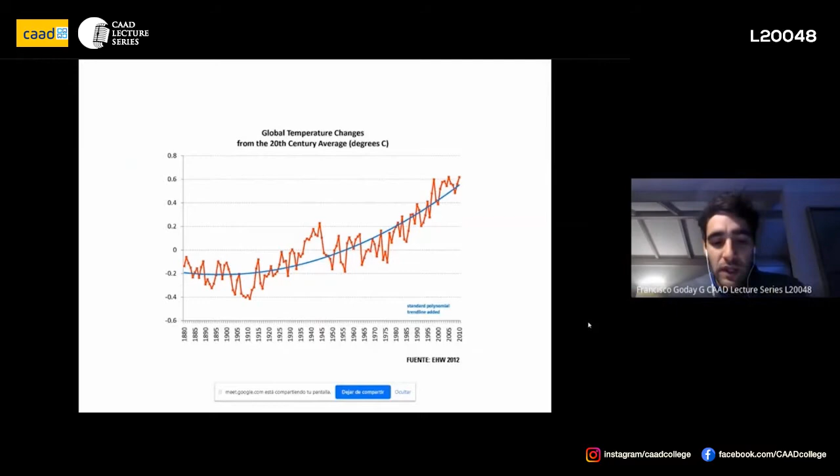For example, during 2016, the global tree cover loss was 21% higher than in the last 20 years. In 2017, here in Chile, we lost more than 450,000 hectares of forest. This was more than in the last 10 years.

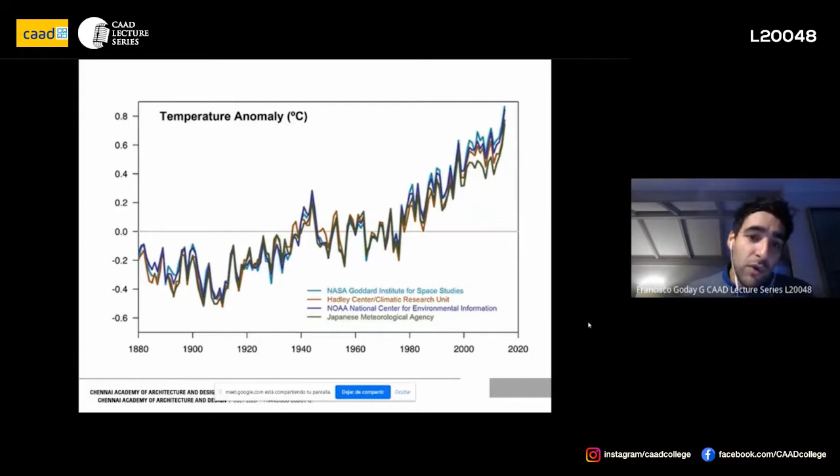For those of you not familiar with this subject, the greenhouse effect is a process that occurs when gases in the Earth's atmosphere get trapped and trap the heat produced by the sun that hits the Earth. This actually makes the Earth a very comfortable place to live for humans.

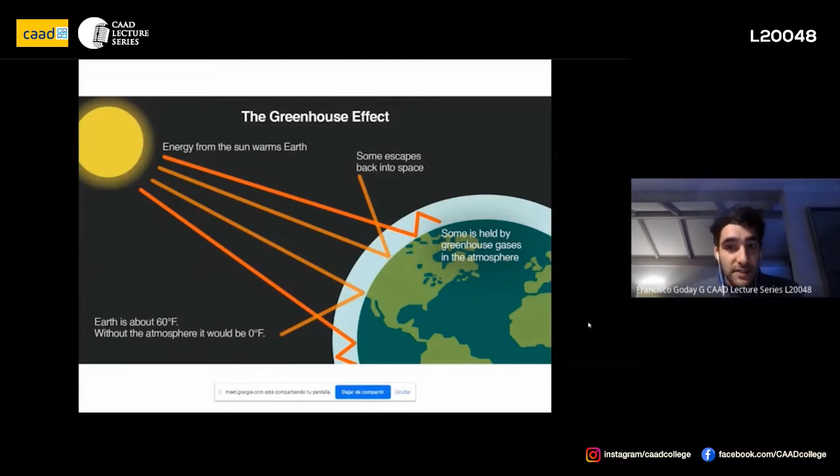But the problem is that these gases that trap the heat have never been so high, especially the CO2, which had never gone beyond 300 parts per million in the history of this planet, and nowadays is reaching almost 400.

This graph is part of the movie An Inconvenient Truth, which I recommend to all of you. It was directed by Al Gore in 2006, who was a former USA presidential candidate, and it explained very well and in detail this process of global warming that we are living and how we should face it.

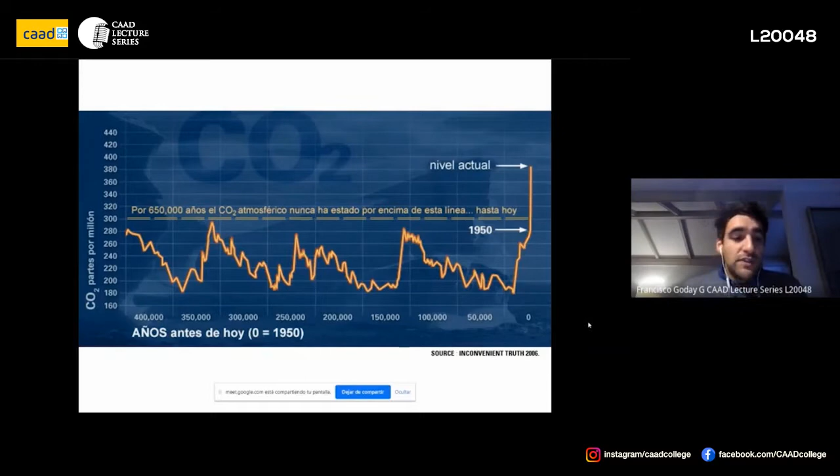So the CO2 comes from most of the activities we do in our daily routines, especially the energy we use every day. Probably all the energy we consume, all the activities we do, that energy comes from oil, coal, and gas. Those are non-renewable energy resources, and they also produce high CO2 emissions.

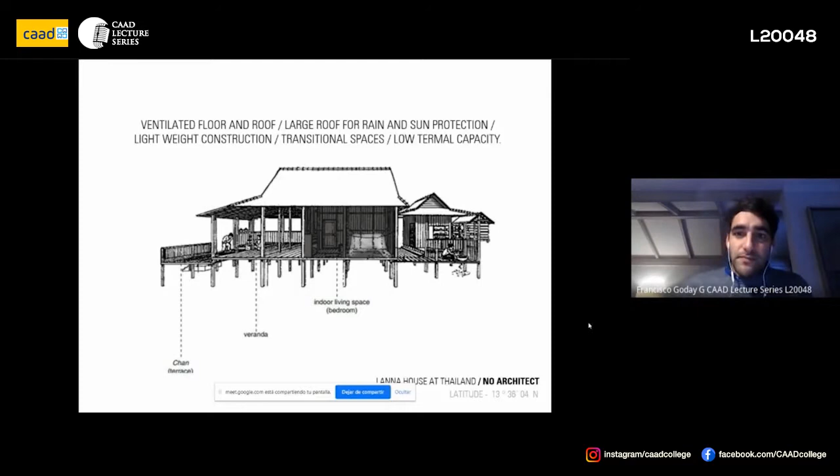Well, we can look at this for a long time, but to make my point, I think this quote from Le Corbusier, 1957, is very interesting: tradition is the unbroken chain of all the innovations, and thus the surest indicator of the projection to the future.

This opens the second part of the lecture, which is my academic approach and my interest in vernacular architecture, the kind of architecture without architects. It is the purest architectural response to the needs of a person or a society. These methods and strategies from these architectural typologies are tested through a process of trial and error, directed by adaptation to climate, availability of materials, function, and the traditions and sociological needs of a given culture.

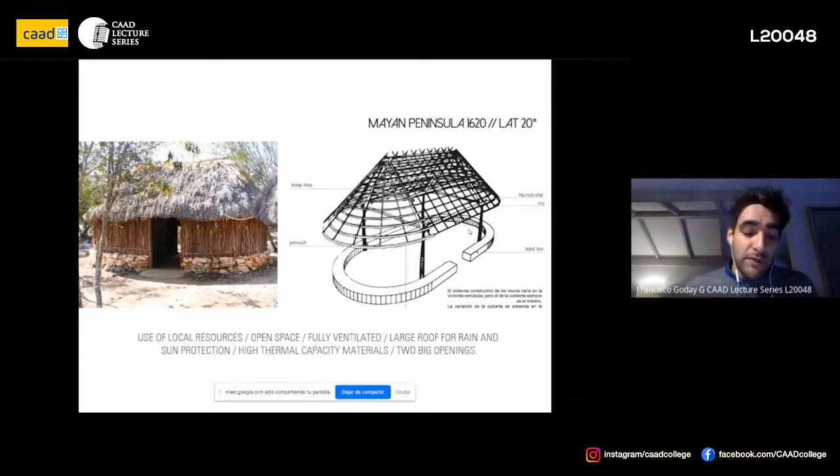Amazing wind catchers in Dubai also work with thermodynamics. The cold wind goes down this chimney, cools even more passing through an underground tunnel, then goes through a water fountain and gets into the habitable spaces of the house, offering much better conditions for the inhabitants. These are all simple strategies using physics, and of course reducing the energy consumption of the building to nearly zero.

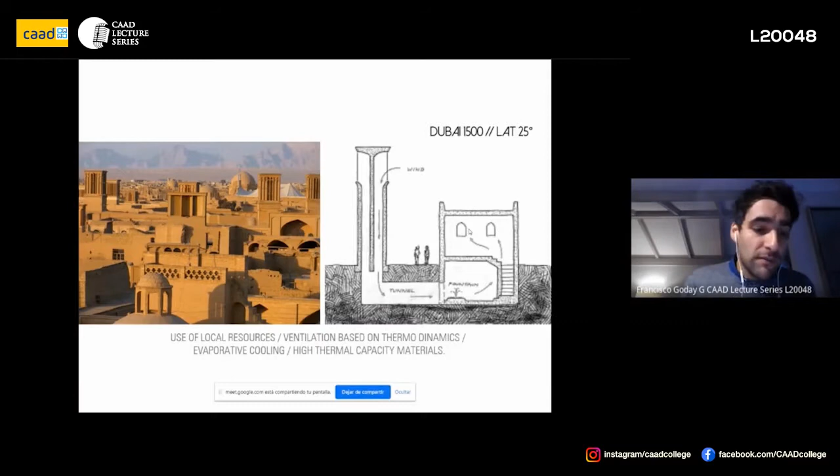To tell you a little bit about my country: in Chile we have more than 22 different climates, ranging from the driest desert in the world to Antarctica at the South Pole. I wanted you to remember that for us, north is the orientation facing the equator, and south is the other side—it's not like in India.

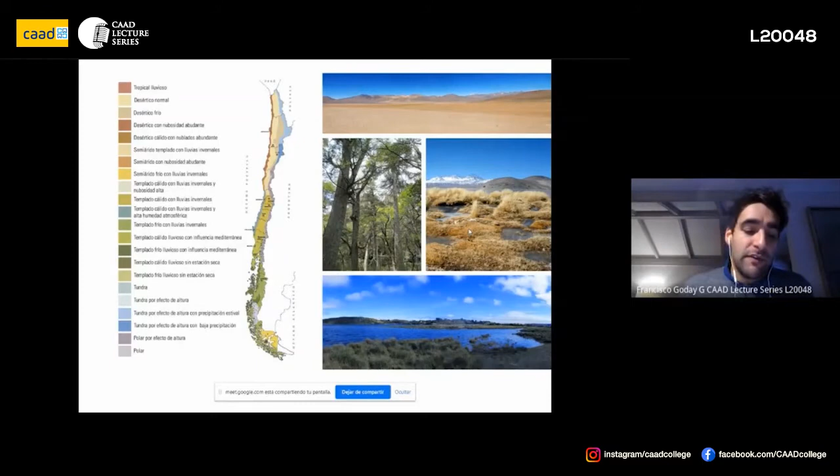The different climates we have in Chile are due to three main factors. The first is the longitude of the country—we go from latitude 18 to latitude 53 in the south, more than 6,000 kilometers of coastline.

The second factor is the Humboldt Oceanic Current, an oceanic current that brings very cold water from the deep sea to the upper part of the sea, drying the atmosphere and producing this dry ambience in the zone of Atacama.

And also the geography of the country—we have the Andes Mountains on one side, and these produce several valleys in the middle, between the Andes Mountains and the coastal mountains.

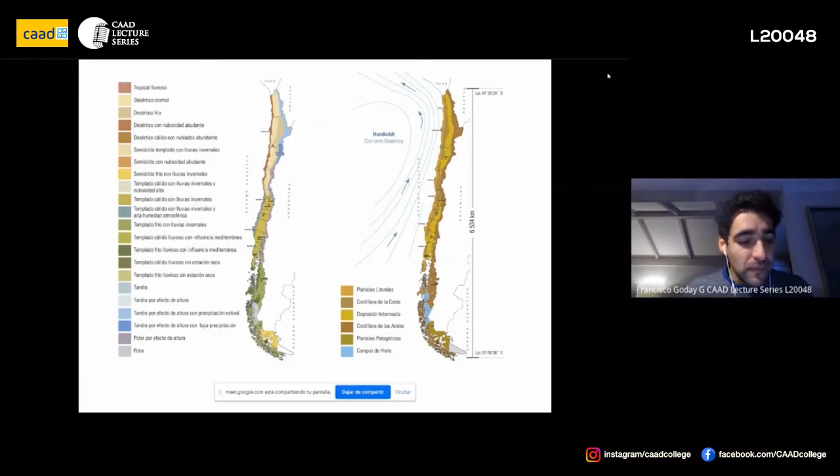We also have different kinds of vernacular typologies, ranging from the extreme north with the house of the Atacameños, in the Central Valley the Chilean traditional house, and the ruca, which is the typology our Aborigines were using before the arrival of the Spaniards. Then in the extreme south we have the palafitos, a house placed between the land and the sea, on stilts over the water.

So I would like to go a little deeper into one of the Chilean traditional houses. All these analyses are part of the investigations we do in my academic courses. The Chilean traditional house is at latitude 33, with a climate that is hot during the summer but very cold during the winter.

This house is an adaptation from the Conquer typology, the Aragonese house that comes from Spain. That house was a three-story building with a small patio in the middle, but probably in Chile, because of the available materials and the earthquakes, it was built as one story, more expanded, and completely looking inwards as a way of protecting the family from Aboriginal attacks.

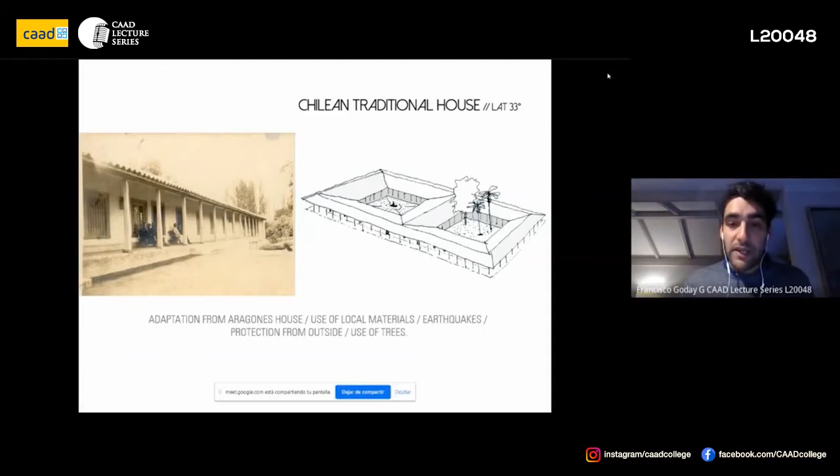It was divided by two courtyards, one social and one private, with corridors and eaves that configure transitional spaces all around the house. These eaves were designed with solar geometry, allowing solar radiation inside the spaces during winter and blocking it during summer.

The material, which is adobe, a mix of straw and mud, offers a high thermal capacity material that traps the heat during the day and releases it during the coldest hours of the night.

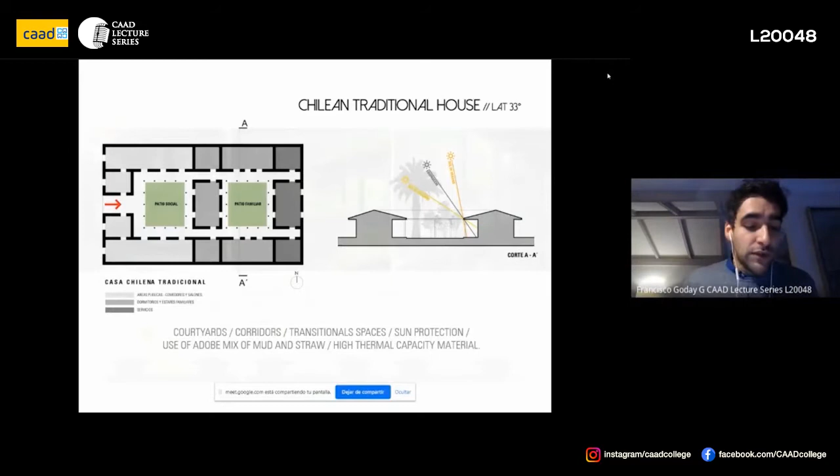These two courtyards were spaces of social delight, but also, if you see the floor of them, they were made of stone. They were also trapping the heat received during the day, and during the night, with cold winds going down the center of the courtyard, as you can see in the schemes at the bottom of the diagram. This heat moves from the center to the interior spaces and corridors of the house.

The trees that you can see in these courtyards were also a decision. The palm tree acts as an umbrella, blocking solar radiation into the courtyard during summer when the sun is very high, but allowing the sun inside the courtyard during winter when the sun is lower in the horizon.

As a conclusion to this part, I would like to read this quotation from Amos Rapoport, from his book called House Form of 1969, which I think resumes what vernacular architecture is, and the importance of taking these strategies into consideration and applying them in our designs. These builders and artisans have learned to solve their problems collaborating with nature, considering that each failure would mean having to face the forces of nature in first person, which is not the case of an architect designing for someone else. His buildings have long been adapted and designed as natural refuges to protect and safeguard life, no matter what that means.

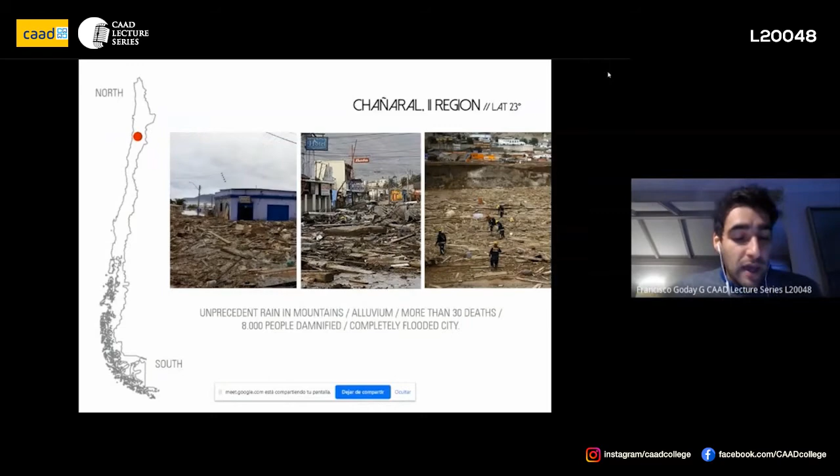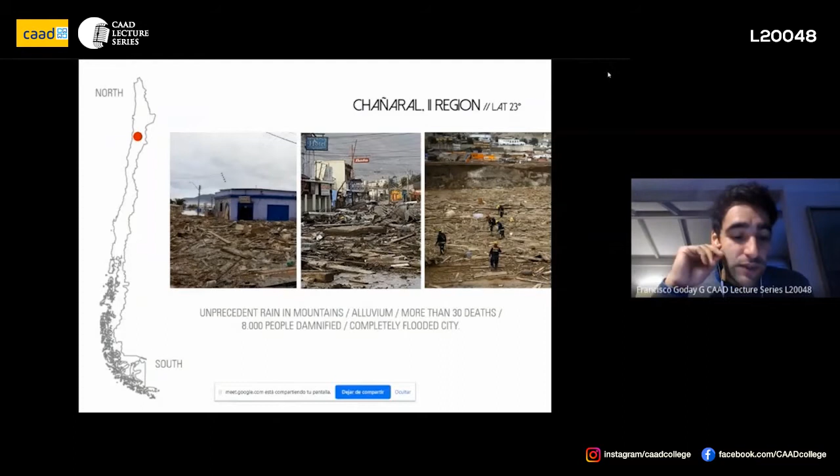During March of 2015, they had unprecedented rains during the summer that produced a huge alluvium inside the city, with more than 30 dead people and 8,000 people damnified, everything completely flooded.

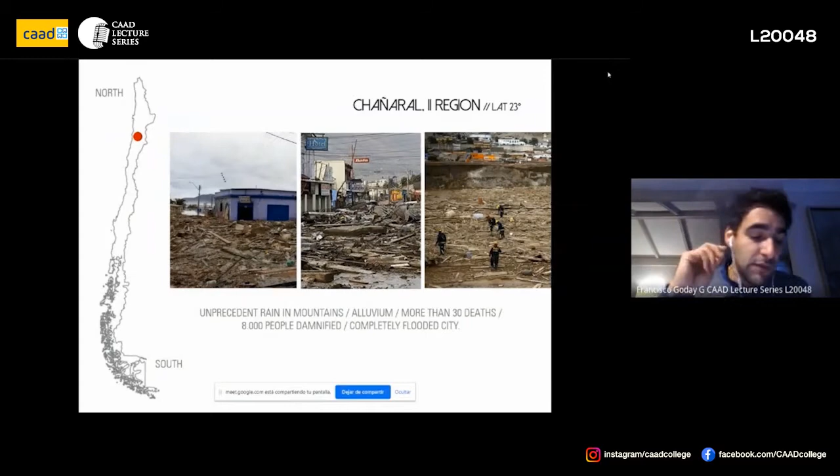So we were invited to this huge challenge. We had 120 days as part of an interdisciplinary team of professionals to build a master plan for the city, and also organize and rank the investments of the city for the next 10 years.

We built this structure based on analysis, diagnosis, and proposal, specifically on four main subjects that were fundamental for us: protect the city from its geographical risks, and the urban growth and regulations of the city—how the city was growing and how it was moving.

Also the mobility, to understand how people were going from one side to another, and of course the public spaces and green areas, to understand if people were using the city or not.

Our main objective was to create the first city in Chile that organizes according to climate, geographical risks, and sustainable mobility in public spaces, with public spaces centered on people.

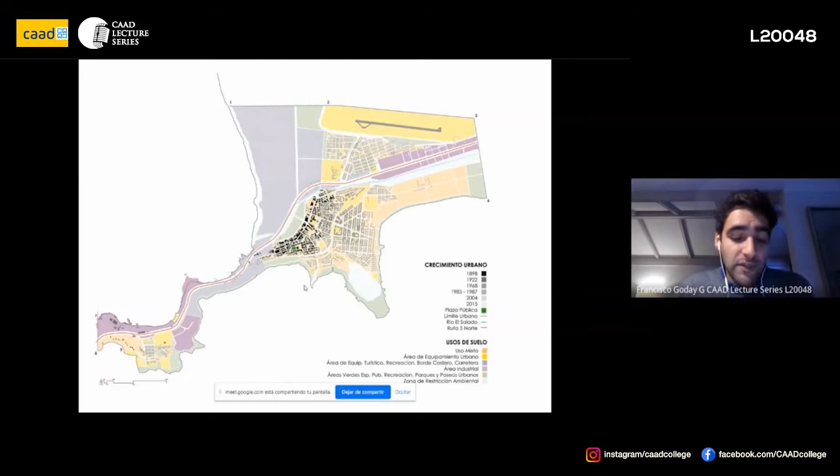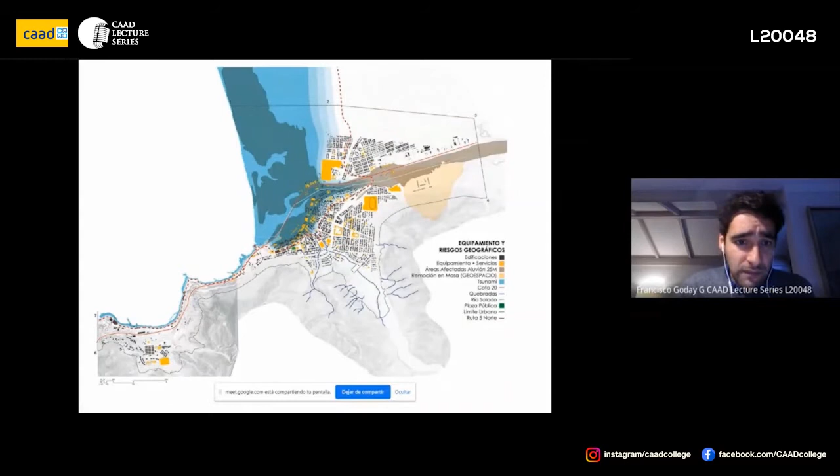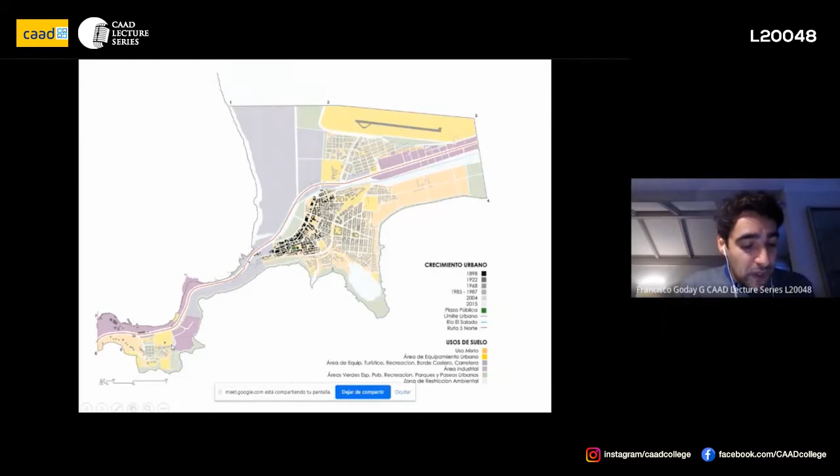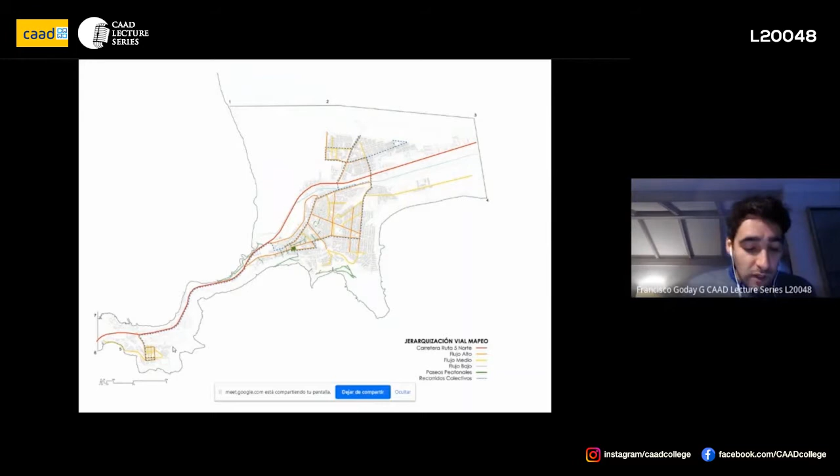This third plan shows mobility, which was complete chaos inside the city. We organized three dynamics according to fluxes and different velocities inside the city, with a good network of bicycle paths and reduced car use in the city center.

The public spaces were also a big problem. None of them considered important infrastructure in relation to the climate; there was no shading in any of these public spaces. Most of them were residual spaces of the city and were all trapped by drug dealers and gangs.

So the location of these public spaces was also a problem. Most of them, or the configured ones, were in the perimeter of the city and were not part of the daily circulation of the people.

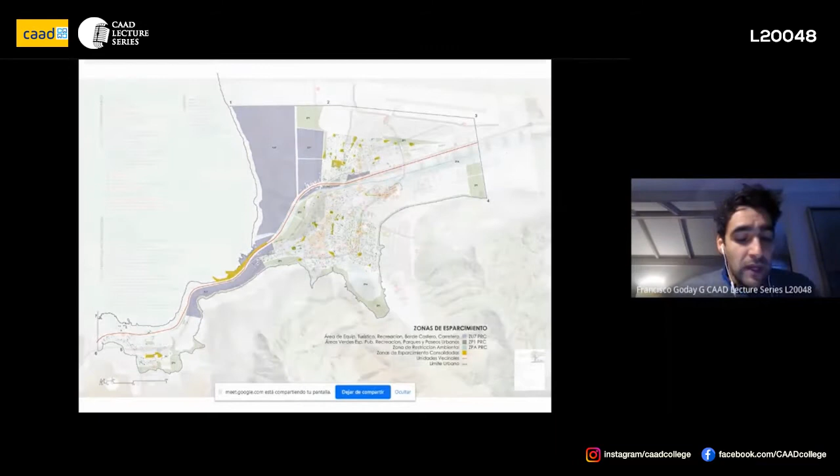As you can see in the final outcome, we proposed a series of decantation pools to reduce the risk of alluviums, a mitigation park in front of the beach with infrastructure to reduce the speed of possible tsunamis, and important networks of roads and paths for different uses, promoting mobility inside the city.

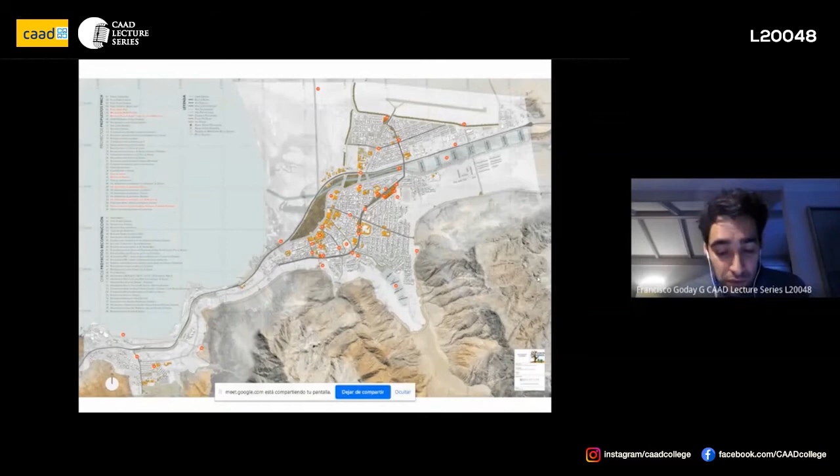The use of bicycles was promoted, and since this is a small town of no more than 30,000 people, it was easy to move from one place to another. We also proposed more than 30 projects, shown as red dots, fundamental for the economic growth of the city in its future. We developed 10 of these red dots for construction.

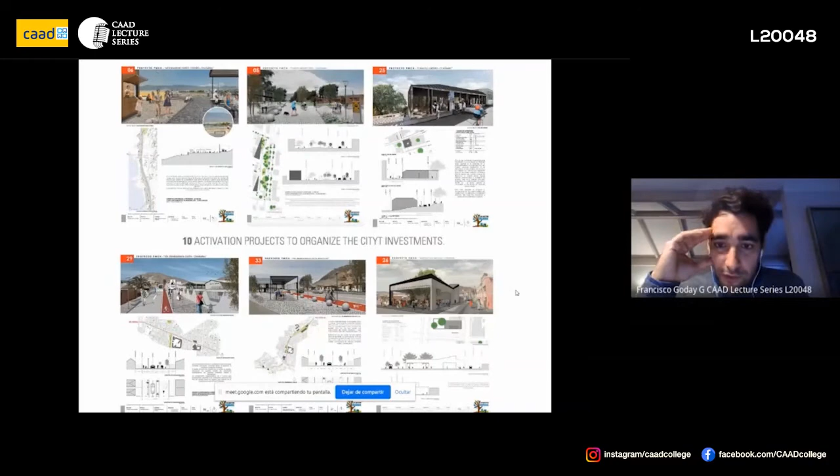This included a market for the city center, the new municipality, different ways and paths inside the city more focused on people than cars. We also renovated some existing parks inside the city and promoted tourism as one of the main subjects and issues for the city's economic growth.

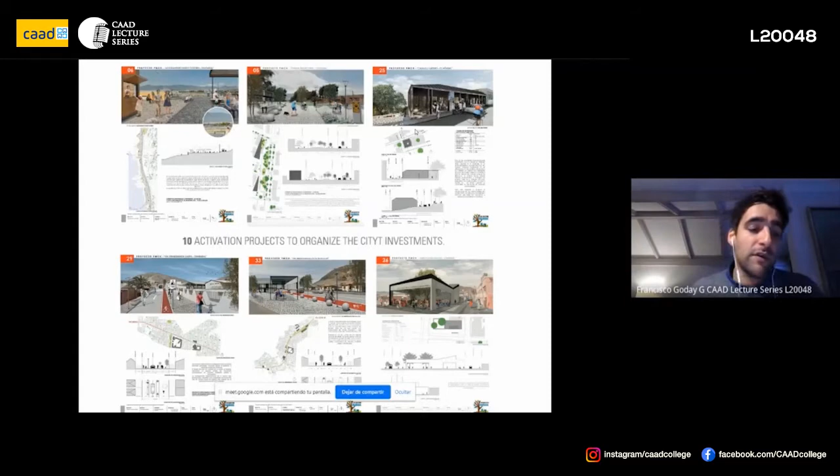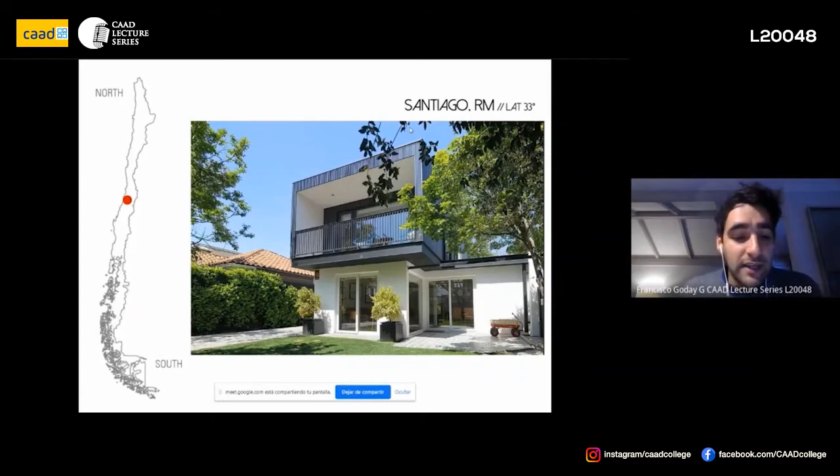You didn't have the possibility of going to the main garden, so it was completely closed, and you could only go through the main bedroom. With small movements on the first floor, we moved 44 square meters out of the 130. We convinced the client to open a small patio in the center and design a family room in this place in order to open the south garden of the house and have open circulation from one side to another.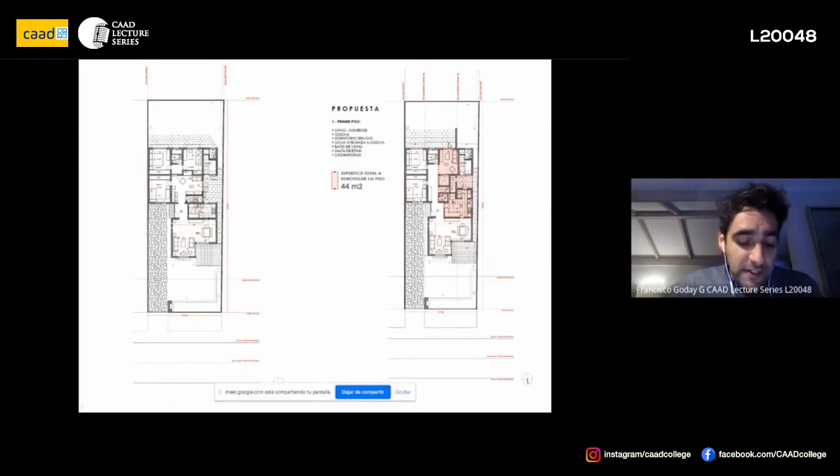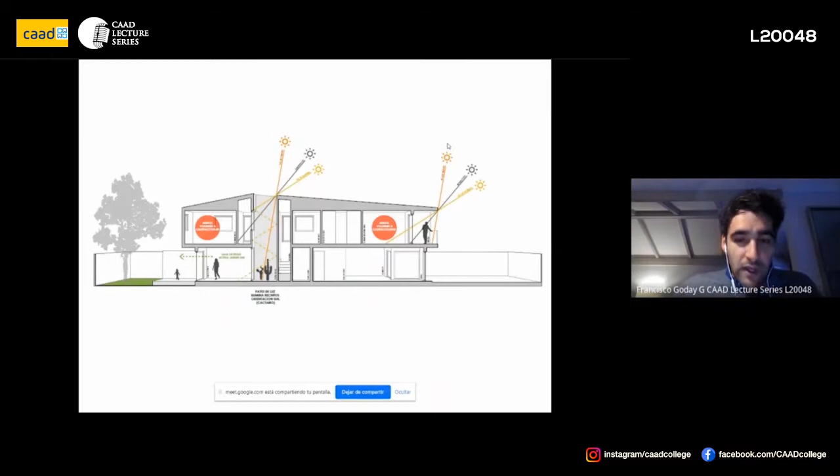This is the section we proposed. Using solar angles and white walls inside the patio, we managed to give natural light and ventilation to the entire south side of the house. If you look at this image, you can see how the small patio works—it completely changed the structure and atmosphere of the house inside.

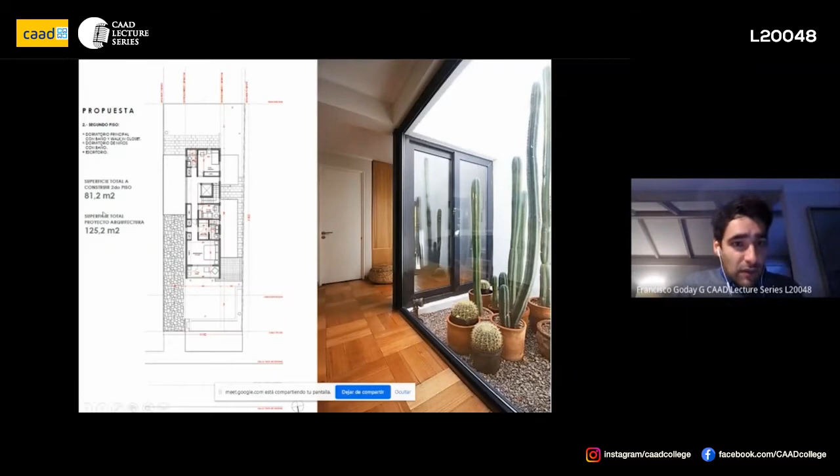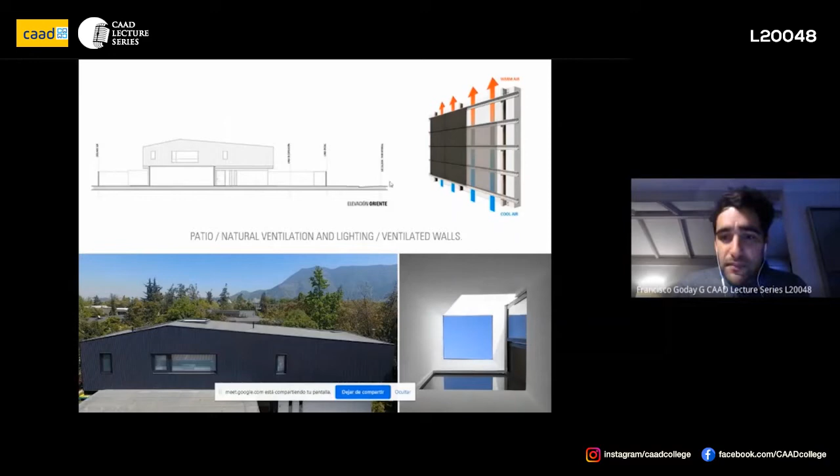This is also the proposal for the second floor. It was a large volume, very clean but also very conventional inside, so I won't spend too much time on that. We also designed a ventilated wall for the entire second floor that we added to the house—the exterior panels are made of black steel to improve ventilation inside the walls. As you can see, this is how the patio, the main facade at the east, and the interiors and terrace of the second floor look.

So this next scheme is a house we hope to start building after the coronavirus pandemic finishes. It's in Casablanca, latitude 32, very similar to the climate of the previous house but more near the ocean. It's for a family that lives in the USA but comes sometimes during the year—sometimes just the mother, sometimes the whole family with 4 kids, full of people. So it was quite challenging to create a house that has the ability to adjust for the amount of people coming.

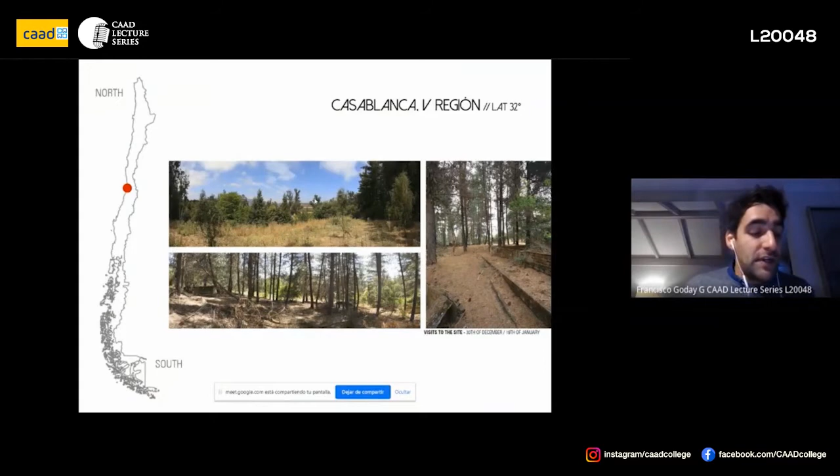The site was very interesting. It was a small slope to the east, full of very high trees. As you can see in this plan, the sun was not in direction to the same space as the valley, but we have the prevailing wind. We also have a main house with a pool and a tennis court that we need to connect in some way with this new house, which will be positioned in this place.

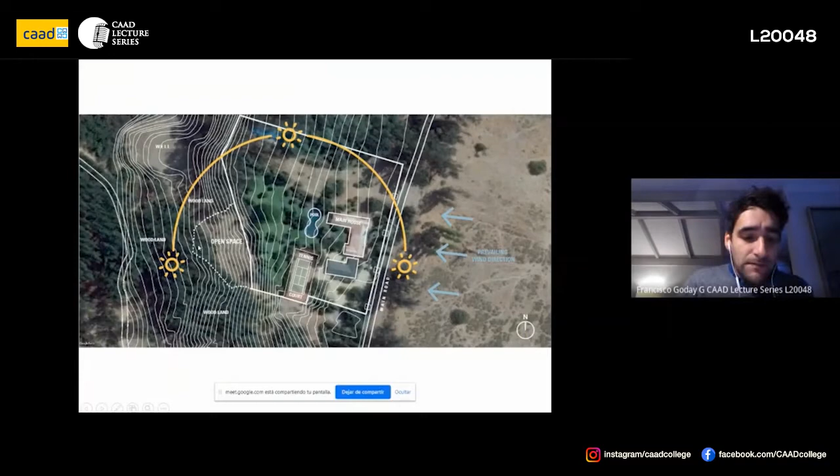So we were ready to start building. From this main volume, we divided into 3 parts. We had this horizontal circulation, the natural ventilation of course, and the solar radiation that was very important for us. But also we wanted to have the landscape inside the house.

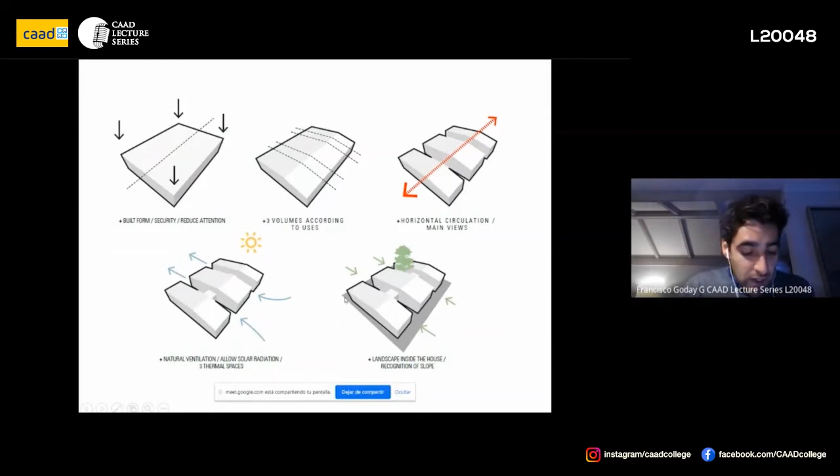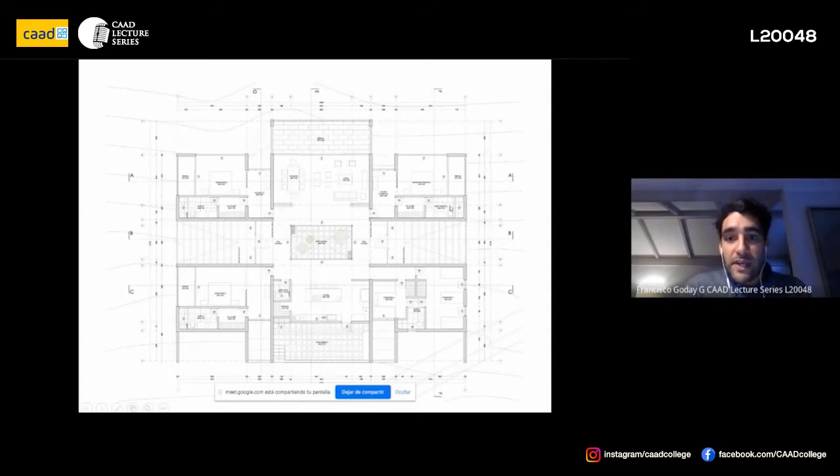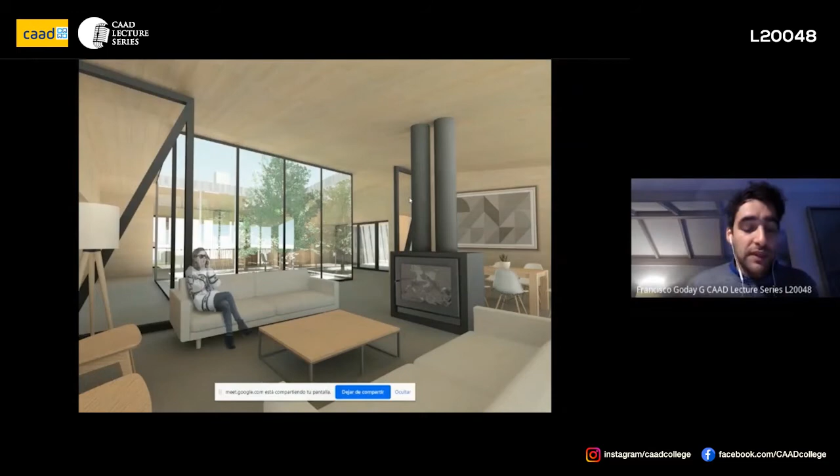This is a view of the interior and the patio, and you can see how the space flows very fluently from one place to another. Here we have other images and perspectives of the house.

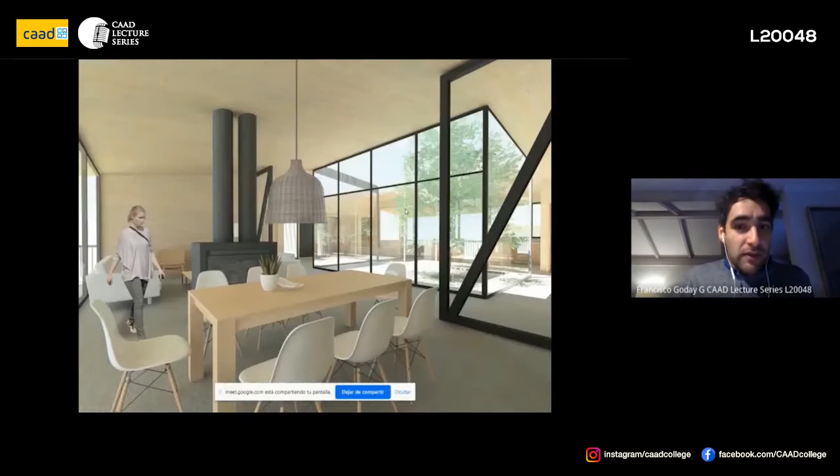We also always test the interiors. This is a simulation for the winter solstice at 12:30. They wanted a very lighted house, and probably they will have it, as you can see.

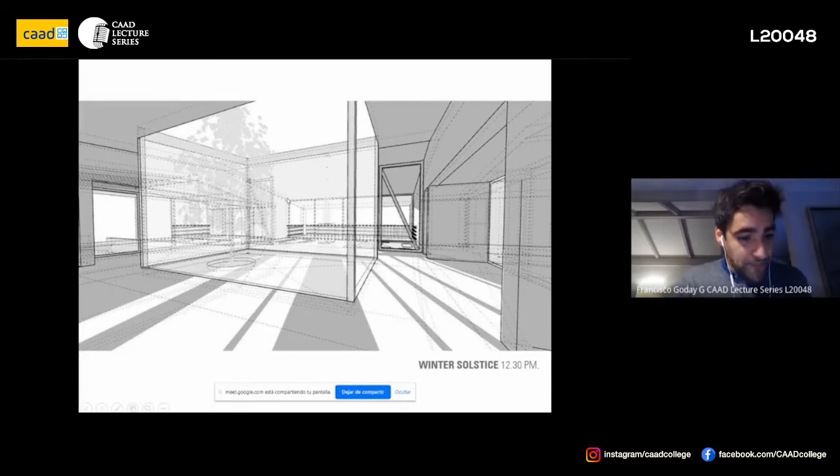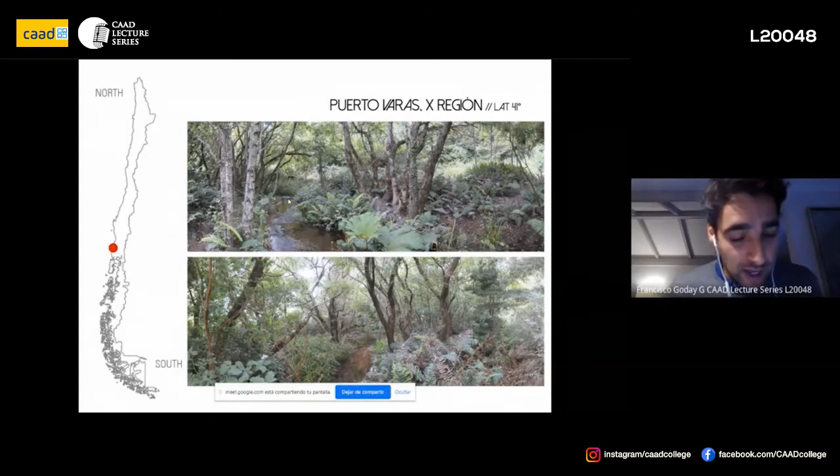So this is the first project I will show you in Puerto Varas. This is south of Chile at latitude 41. The climate here is quite cold during the whole year, very rainy, and they have no more than 2 months with a hot period, but not very intense.

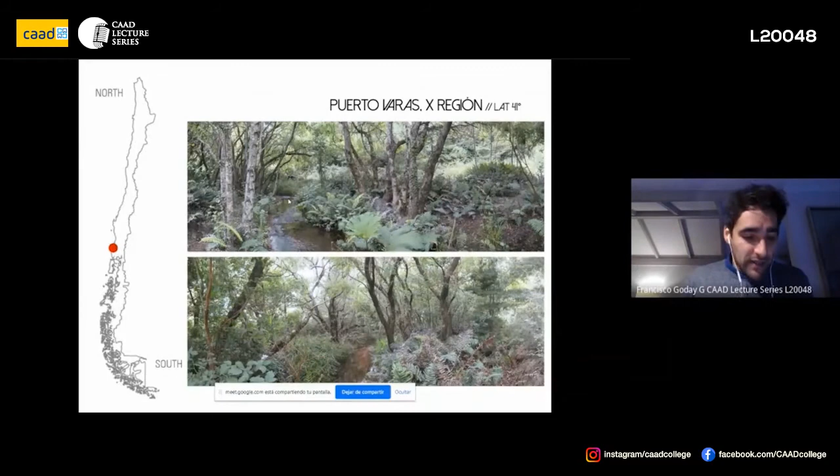This project is for a restaurant. It was in the middle of this plot with amazing nature, with woods and forest, and also a river going through the plot. It was also on the Riviera of a lake, Lake Llanquihue, one of the biggest lakes here in Chile. What was interesting about the plot was, of course, its relation with the lake, but also its orientation, since it was completely oriented to the north, which is our good orientation, the facade facing the equator.

And it was, of course, in the middle of this forest, so it was very challenging to illuminate the interior of the building. In this case, nature was telling us more from the landscape, so we recognized 4 different landscapes inside the plot. As you can see here, we had this first space that was more like a forest, then the second part, related to the river with specific vegetation in this place, then the Lake Riviera with also a very specific kind of vegetation, and then the beach and the lake.

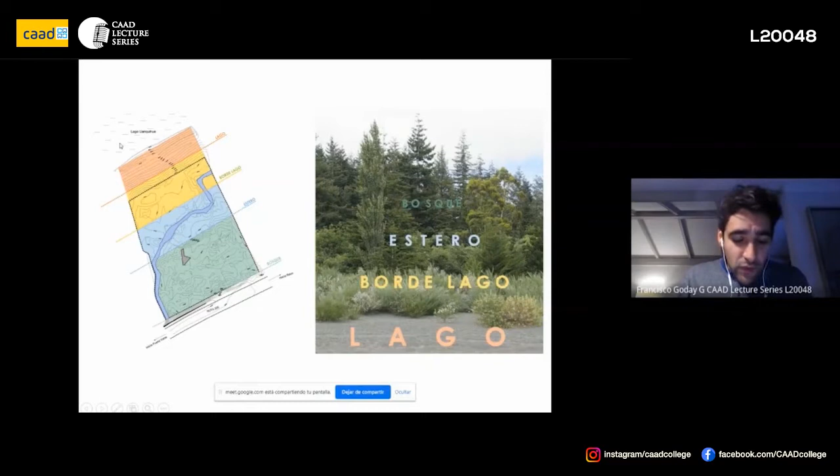So our first proposal was to create an experience for the people who visit the restaurant. The first line was this long path that was crossing the 4 different landscapes of the plot.

And then a second system of paths connected the other programs of the project, like a small house, the orchard and winter garden, the beach, and of course the restaurant, which was the main attraction of the site.

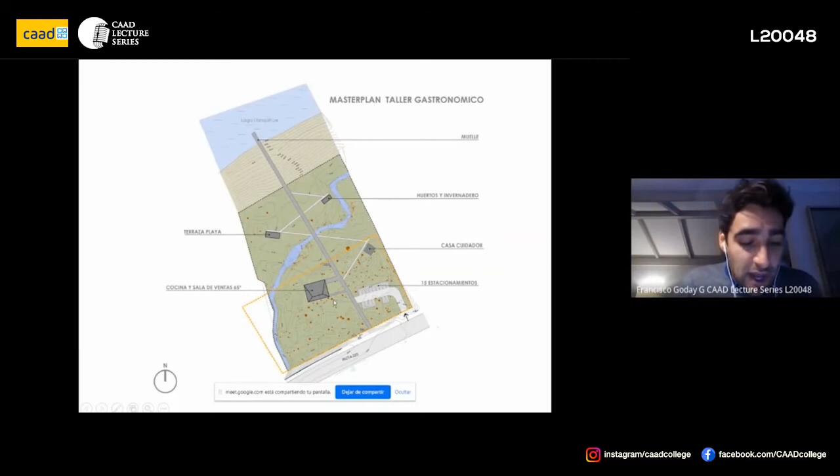With the program, we wanted to create an interior-exterior space, a place where you have all the thermal comfort of the indoors, but with the continuous presence of the outside and the surrounding. So we proposed the kitchen and services on one side, and the bar at the other side, leaving the main space in the middle, in direct contact with the nature and outdoor landscape.

As you can see, we use transitional spaces with exterior corridors to create a graduation of temperatures from outside to inside, and insulated night shutters to keep the interior warm during the night. The interior is very comfortable with good natural lighting. I won't show the simulations we did because it would be boring, but it's also very well ventilated. This wall is a sliding window that moves from one side to the other.

You can see also how the project blends with the landscape and the nature around. And I have heard that also the food is very nice.

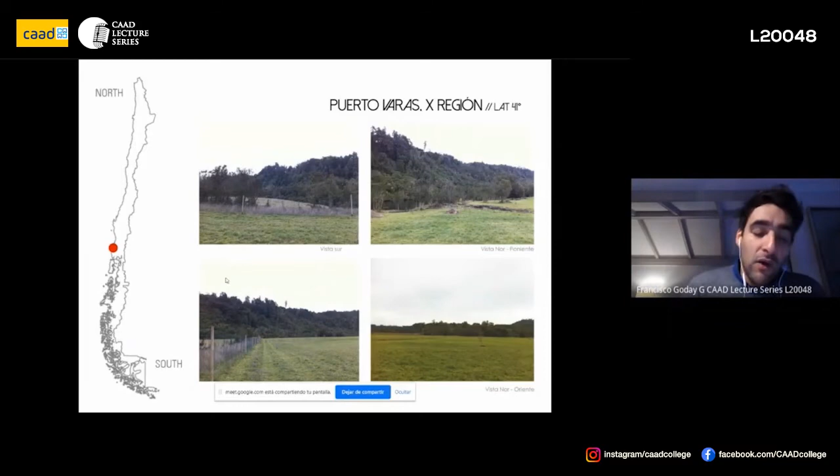So this is another house project in the south, same climate in Puerto Varas, latitude 41. Very cold, as I told you before, rainy all year long. The plot was very big in this case, almost 5 hectares. The north was facing open, and the wind came from the north during bad weather, and from the southeast with good weather.

So we first conducted some wind studies, because when you have wind coming from the north, which is your open orientation since you want the sun to come in, when it rains, the rain, because of the speed of the wind, lays down and hits your north orientation, producing problems like water leaking inside or issues with the windows. So we proposed to the client a small forest in this part of the plot to reduce wind speed and protect the house from the cold winds.

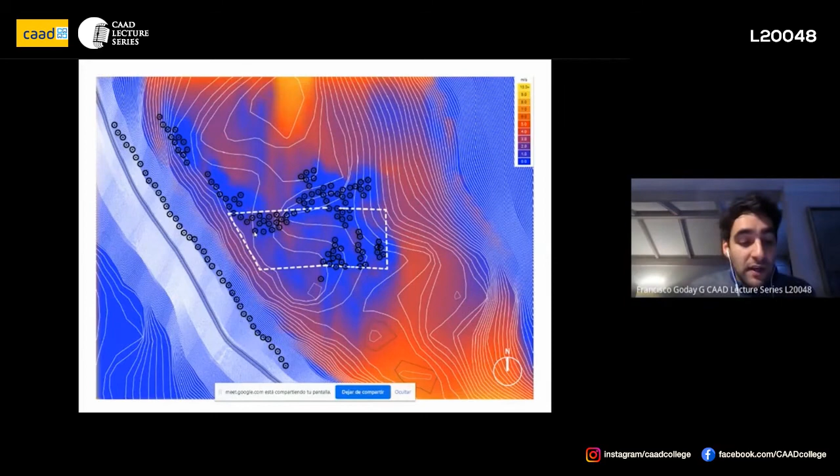This was our first proposal. Then, in order to understand where on the site we should place the house, we ran sun shading simulations to understand where we could ensure solar radiation for the house during the whole year, considering the new trees we planted on the site.

So we found this place that was completely open to solar radiation, and it was just shaded a little bit in winter at 9 a.m. and at 4 o'clock, but during the rest of the year, it was completely open to sun.

So the main strategies here were the compactness, of course good thermal envelope, solar control for summer, the interior distribution putting all the services on the south side, the circulations in the middle, and the habitable spaces on the north side related to the sun, natural ventilation and lighting, and the use of intermediate spaces to have a sequence of spaces that range from cold to warm, like a thermal graduation.

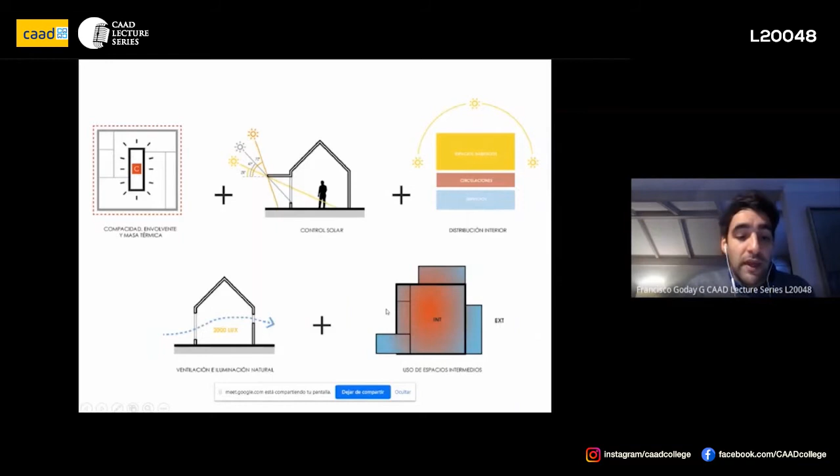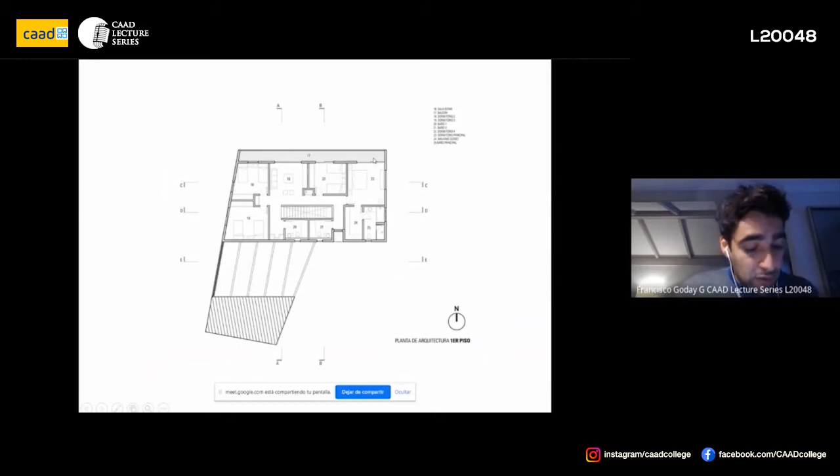The north facade of the building was designed with a window-to-floor ratio of 45%, which is a fundamental analysis and calculation that you have to do in order to maintain the thermal balance.

And also at the end you have simulations of solar shading for summer and winter, and you can see how the house is completely exposed during the winter, completely exposed to sun, but during the summer completely shaded, and the sun is kept outside.

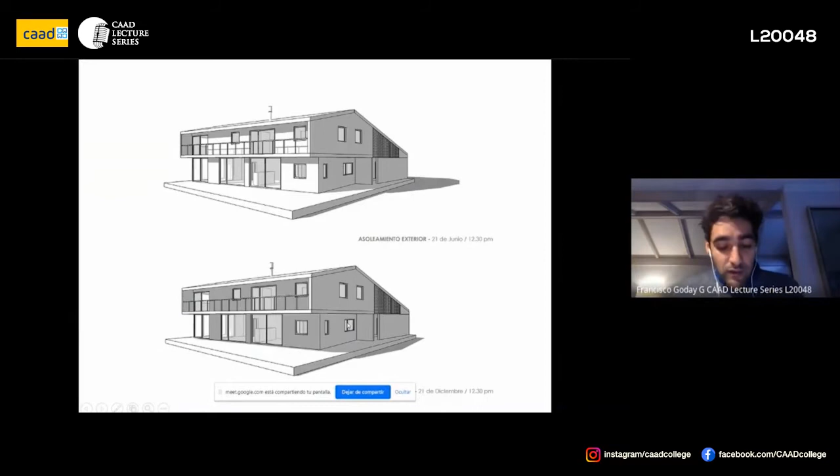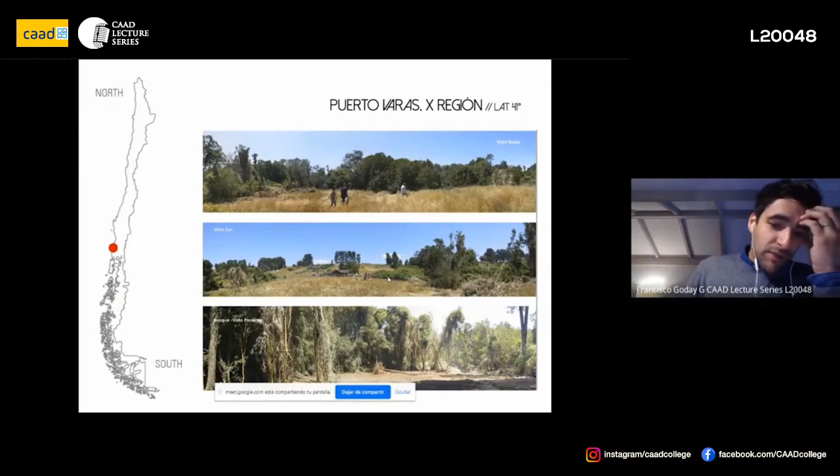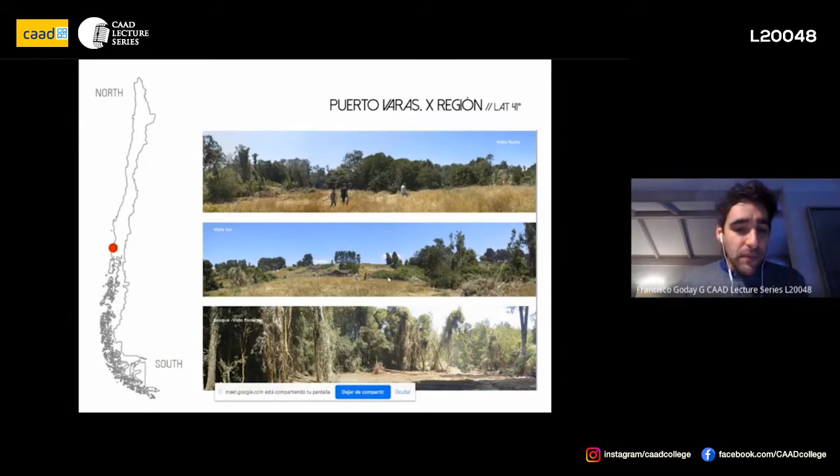One of the last projects I'm going to show you is another housing project in Puerto Varas, same location, latitude and climate. Although the plot was quite different, it was kind of divided into two parts: an upper part more exposed to sun, and a lower part that was more humid and dark, but more related with the lake, which was on this side.

The sun was in the front, so no problem there, but the wind, same as we saw before in the previous case, was coming from the north with bad weather. But since we have this interesting forest in front, it wasn't a big deal, so we have that solved in some way.

So we first did some solar studies again to confirm that the upper level was the best position for building the house. The program is for a family with 3 kids.

So we divided the building into 3 different parts: the rooms, the communal areas, and the services. You come into the house in this part, and if you go to the right, you have all the rooms, the main bedroom and the kids' bedrooms, and a family room here. But if you go left, you have all the communal areas with the kitchen, living room, and dining room connected with the services area.

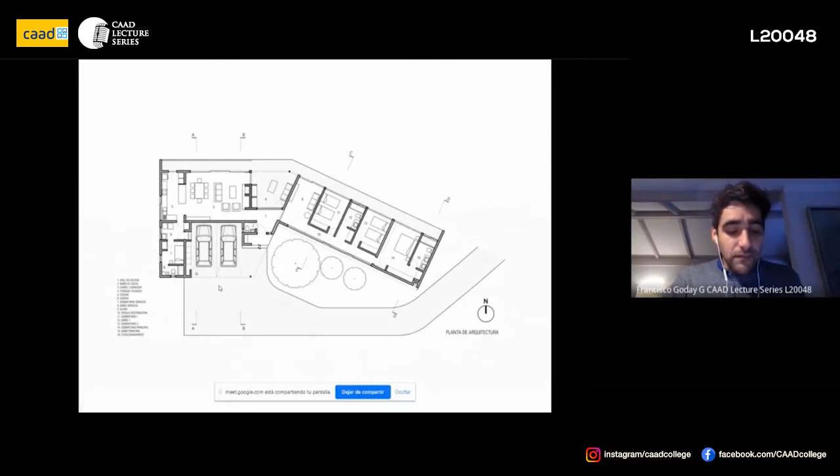As you can see, we use a continuous eave. We designed with solar geometry, allowing the solar radiation inside during most of the year.

As I told you before, they just have this hot period during January and February, but we also designed this eave in order to keep the sun outside during those months. You can see a continuous terrace along the house on the outside, protecting the interior and regulating the temperature from inside to outside.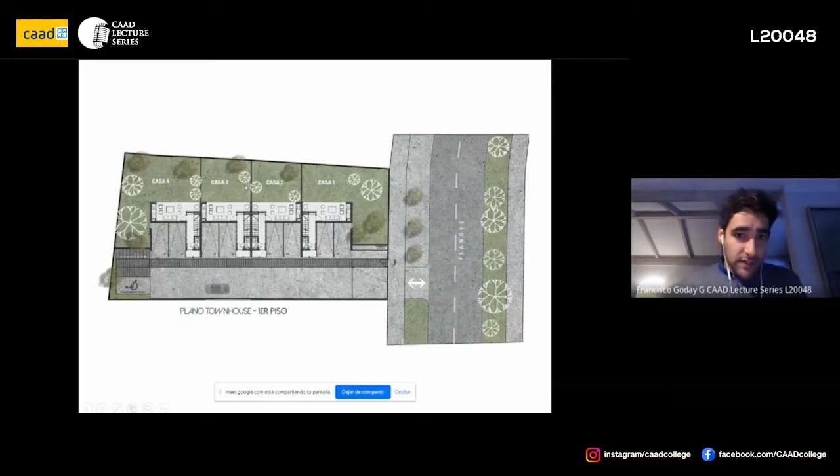This is a more commercial scheme, more conventional of course. On the first floor we have the entrance to 4 different houses. You enter from here, and you go up to the communal areas.

Although it is a commercial scheme, it's also interesting for us in our office because we think it's a very good way to densify the city.

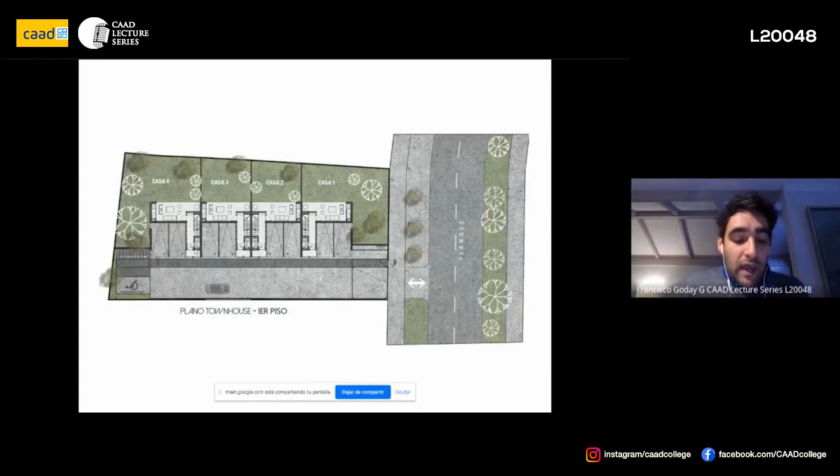We have some strategies to adapt the building to the climate. We have on the south orientation most of the bathrooms and cold areas of the building, while all the living areas and main spaces are north oriented.

So this is the distribution. You can see here, we go in, we go up, we appear here. Then you have all the communal areas, kitchen, dining room, and living room with a terrace. And then on the 3rd floor you have all the bedrooms for the house.

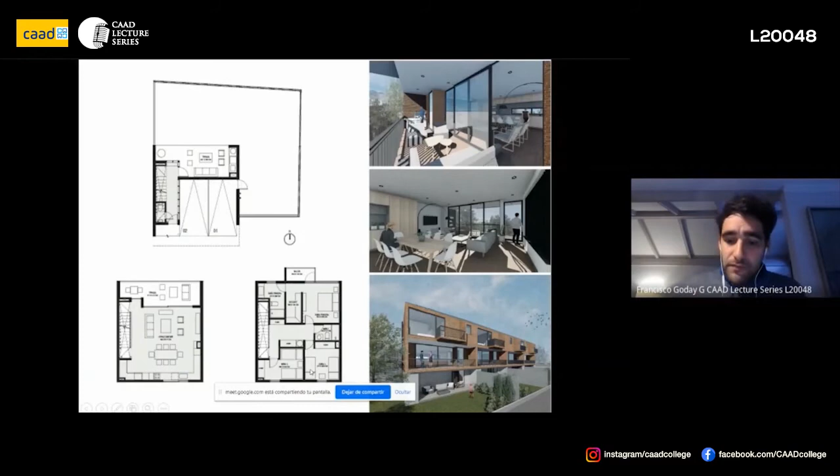So this is how it is looking now, and probably we'll start construction next month. So, well, that's it. Thank you.

All right, thank you, Professor, for your very insightful presentation. I think I really like how you were able to bring an academic perspective and nicely transition into the practical application of everything you've shown us today. I really appreciate how before every project you posed a particular question you had to answer, and got our minds thinking, igniting possible solutions from this presentation. I think our students would really appreciate the amount of calculations, the technological advancement, the simulations, and the amount of study that comes before making a particular sustainable building.

And we have received so many questions from our students, which I am hoping you would be able to answer through the session.

Many believe that vernacular architecture may be more sustainable and climatically responsive, but it may not be adaptable to meet the new lifestyle of citizens. Also, certain vernacular practices may not be economically possible. One example is the Chettinad house, which has about 600mm thick walls to maintain thermal mass. But if you provide such thick walls in urban cities with high square footage rates, it may not always be possible. So how do you address that?